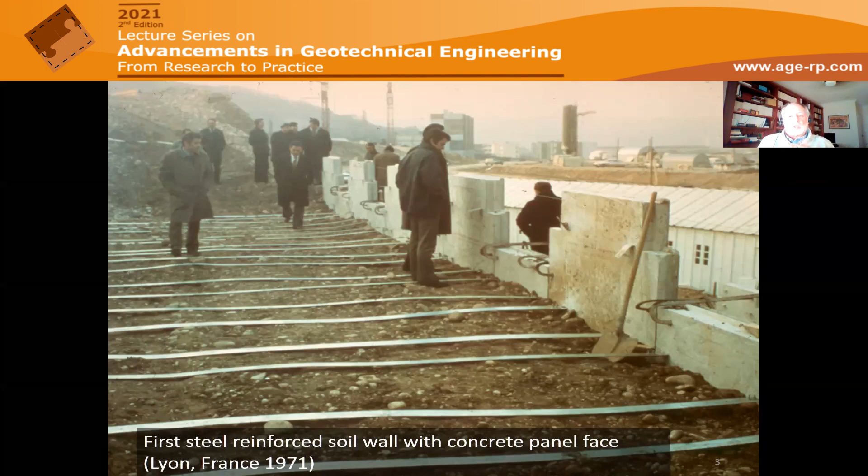Going back in time, the first substantial reinforced walls were constructed with steel strips. This particular slide shows the first example, the first substantial walls constructed in France using steel strips. This slide is very important because it shows the first steel reinforced soil wall constructed with concrete panels. Today these types of systems are built routinely, and some of them are quite impressive, including this steel strip reinforced wall that was part of the SeaTac airport runway expansion near Seattle, Washington State, US.

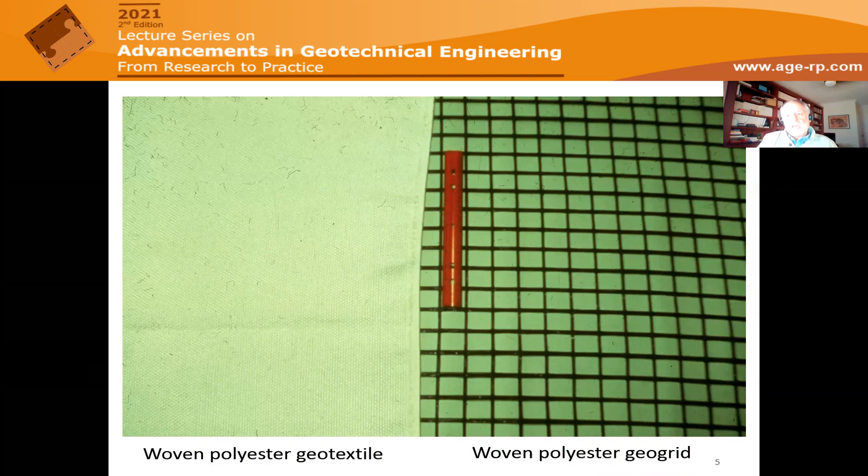Starting in the late 70s and into the 80s, high performance polymeric reinforcement materials were invented, including woven geotextiles and geogrids and many other types. These materials were then available to construct MSE walls.

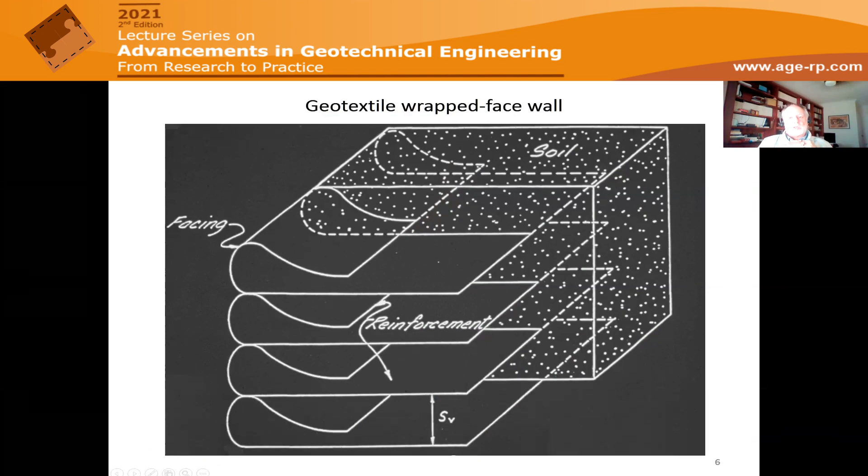The first types were quite simple. They involved placing horizontal layers of reinforcement and then wrapping them around at the front to form the facing and then tucking them back in. This was a particularly efficient way of making MSE walls, although arguably not very attractive. This wall shows the largest wrap face wall of its type at the time it was constructed in 1989 - you can see it's about 13 meters in height, and you can clearly see the wrapped faces or layers. This was used to contain one side of a preload at a construction site in Seattle. It was a temporary structure, and that's why the wrap face was okay.

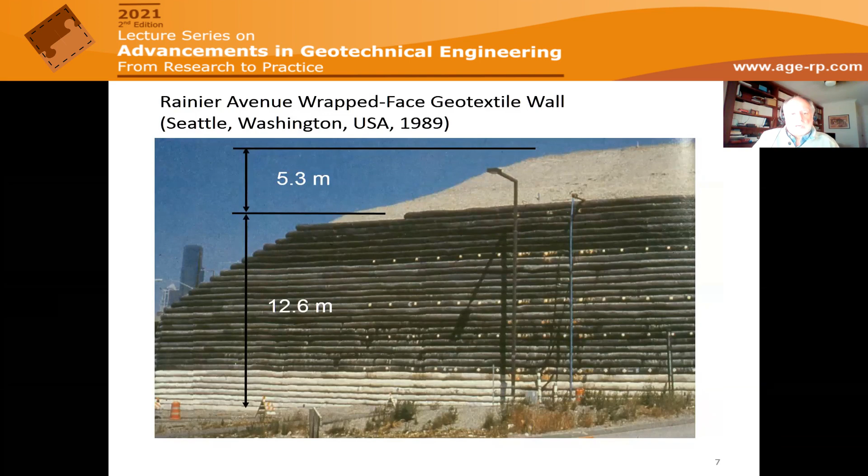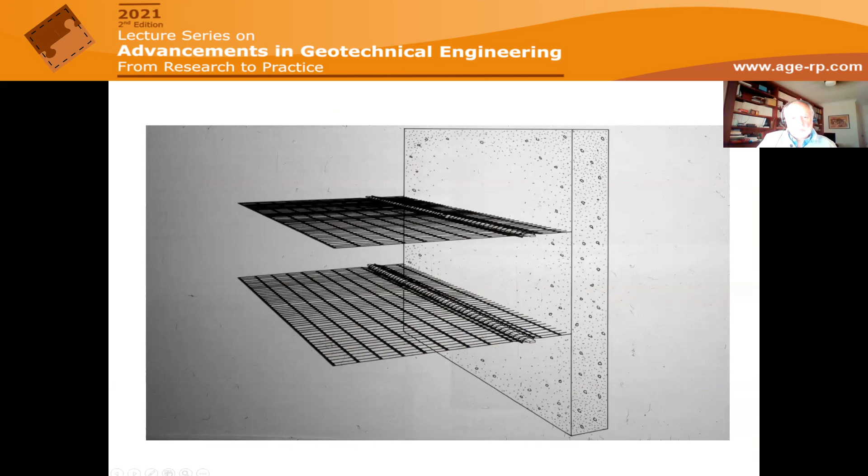Nowadays we see the use of modular block units to form the facing. Most often the blocks are made of dry cast or masonry concrete, and these blocks are stacked to form the facing and tied back with horizontal layers of reinforcement. The facing, the reinforcement layers, and the reinforced soil form a composite gravity mass which acts to resist the retained soil behind it.

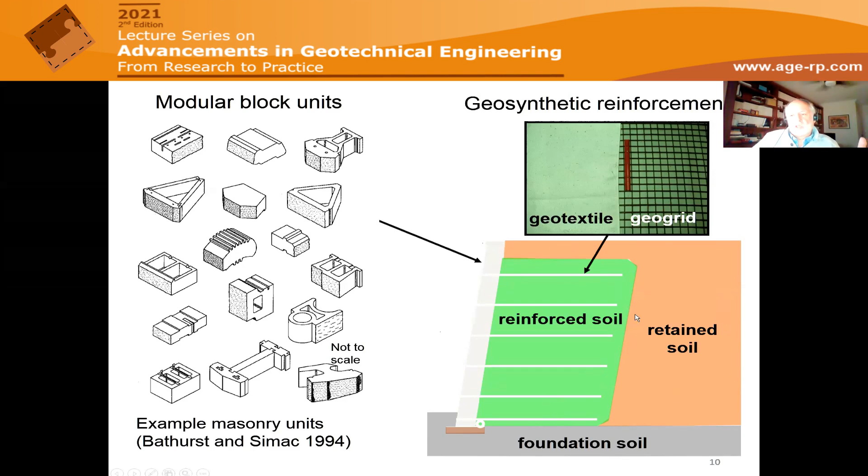The first substantial wall of this type in Canada was constructed in 1988, a 7-meter high wall. This was the first structure of this type I got involved in, and it precipitated a long relationship with this type of technology.

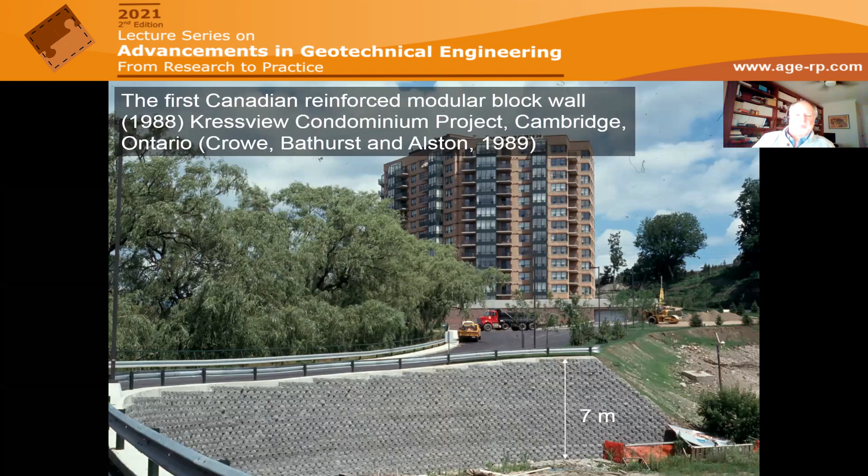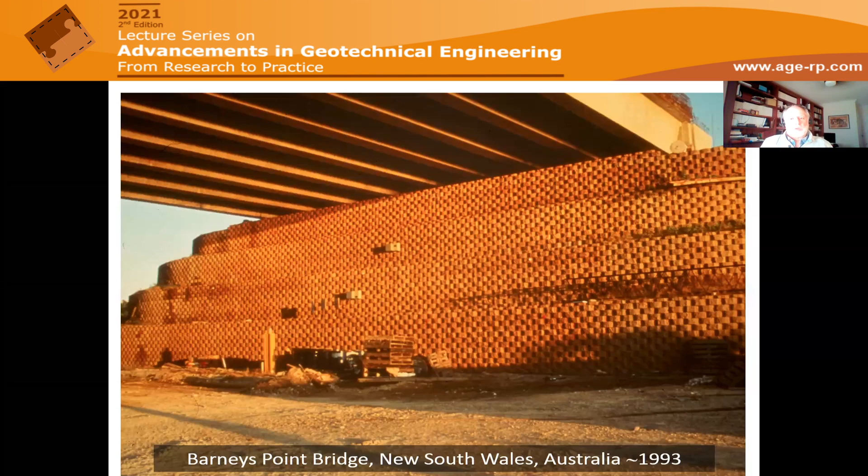This wall may be familiar to some of you. This is the Barney's Point wall, which was part of the support for a bridge abutment about 104 kilometers south of you folks. If you look at the inside of this structure, you'll see it's a tiered wall. You can see the different tiers, and the bridge deck or bridge beam is seated directly on top of the reinforced soil mass. This was one of the first applications of this type, and I must say it was pretty brave, because this was built about 1993.

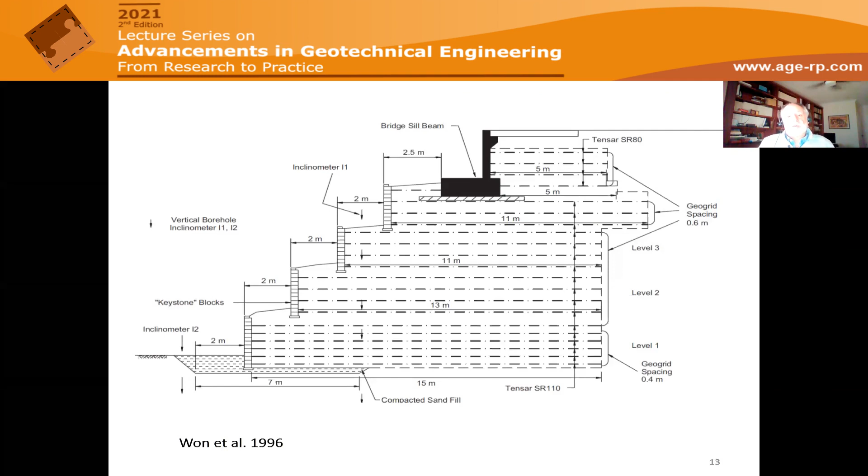Other types of reinforcement materials that have come onto the market are polyester strap type reinforcements. These are strips that are typically woven back and forth, as you can see here, but they perform the same function as continuous sheet geosynthetic reinforcement materials, performing the same MSE function.

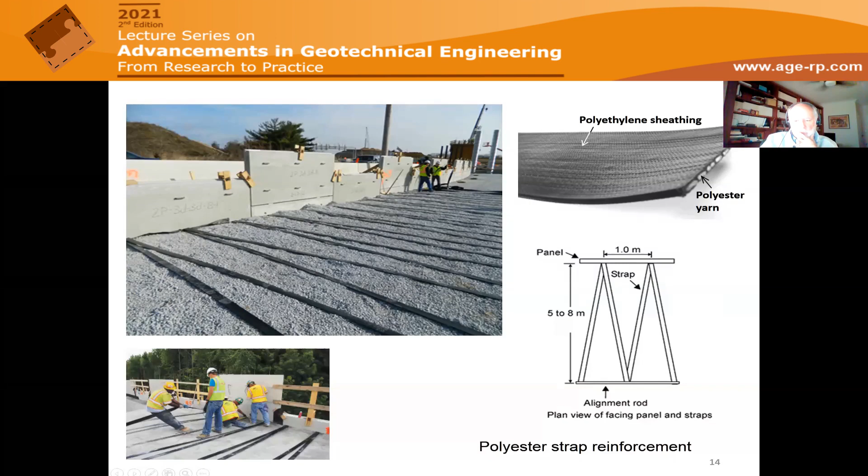So what we're really interested in for this presentation is the internal stability limit state design of these systems. The methods in use today are essentially variants of the classical tie-back active wedge method. What folks have done, including myself, is empirically adjust the predictions of load on the reinforcement based on measurements. But the basic procedure is to assume that the reinforcement acts to tie back a wedge, which will be clearer in the next slide.

These design methods are packaged in different ways. For example, in North America, they're framed within a load and resistance factor method, LRFD, but in Europe and Australia they use a partial factor approach. I'm not going to get into those details — we're going to focus mainly on the mechanics of what's going on with respect to internal stability of these systems.

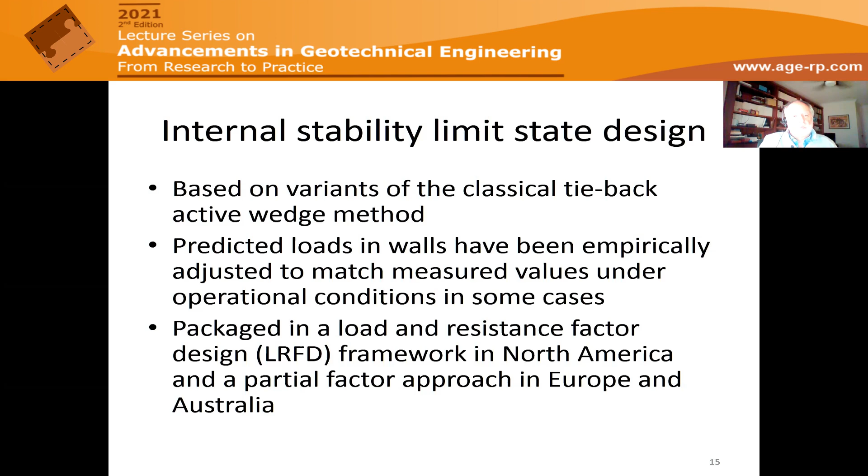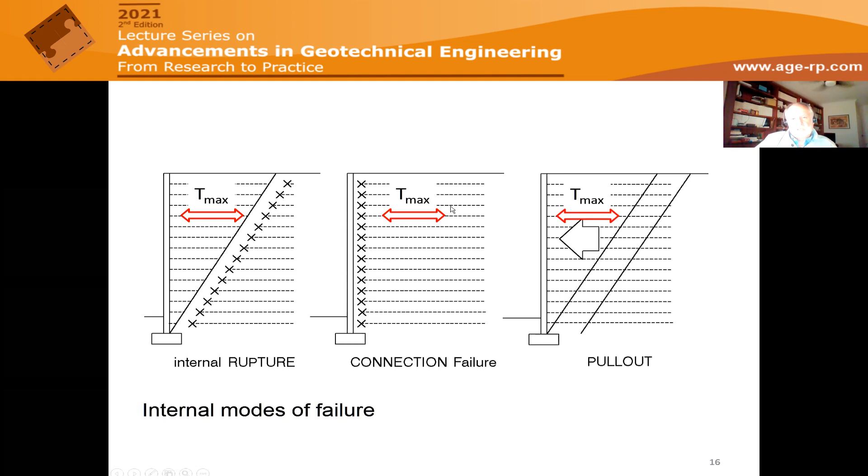My presentation is going to focus on the calculation of the maximum tensile load in the reinforcement. This is the load side in internal limit states, including the limit state for internal rupture of the reinforcement or overstressing, failure at the connection between the reinforcement and the facing, and pullout of the so-called tieback wedge from this resistance zone. So we're most interested in how do we calculate Tmax.

Until recently, our ability to accurately predict these design loads, Tmax, in reinforcement layers under operational conditions was lacking. I'm not interested in the loads at failure — I'm interested in the loads that will be in the reinforcement during its design life under serviceability conditions.

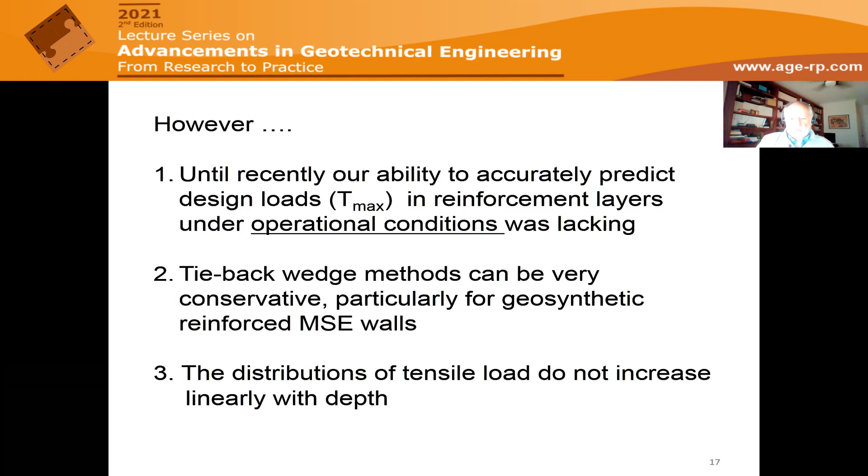What we discovered very early on is that the tieback wedge methods in place a number of years ago tended to be very conservative with respect to the calculated Tmax values, particularly for geosynthetic reinforced soil walls. In addition, the distributions of tensile load didn't increase linearly with depth as one would expect for simple wall configurations. I'll touch back on this a little later.

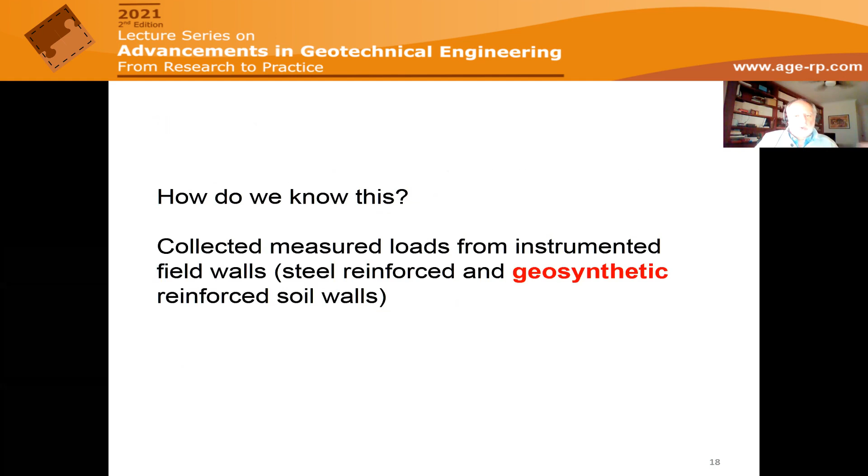So how do we know this? We know this because myself and my colleagues collected, over a period of about three decades, measured loads from instrumented field walls, including both steel reinforced walls and geosynthetic reinforced soil walls, although my talk will focus mainly on geosynthetic structures.

You saw that very high wrap face wall in Seattle. Well, this wall was very important as well because it was heavily instrumented. During construction, at the end of construction, and during surcharging, strains were recorded from strain gauges mounted on the reinforcement layers, and then the tensile loads in the reinforcement were deduced from those strains.

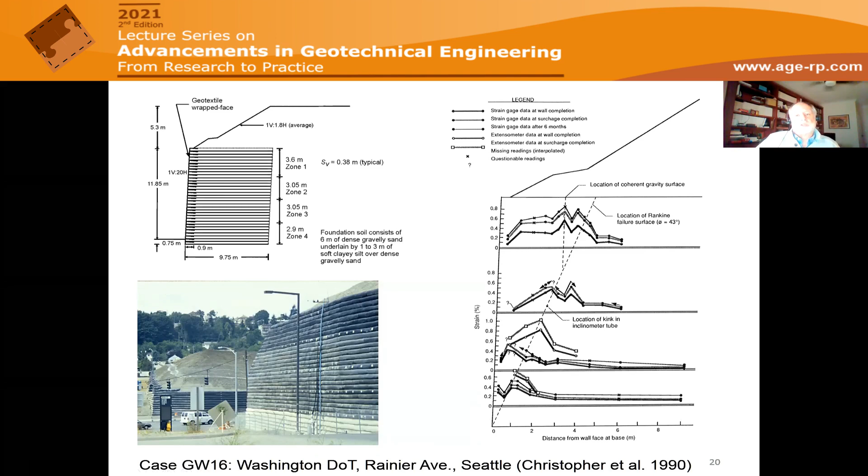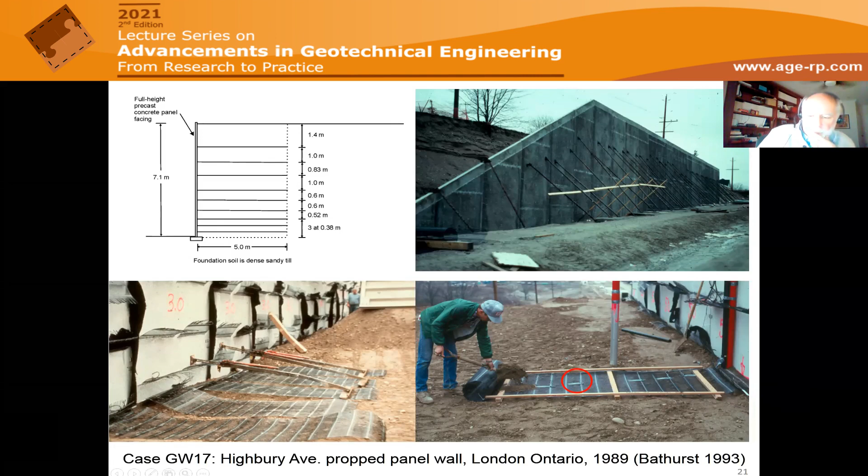So how do we calculate the predicted loads in reinforcement layers? Well, the essential procedure is to assume that each layer of reinforcement is responsible for carrying a certain portion of the horizontal lateral pressure acting against the back of the wall. This lateral stress, acting over a contributory area for each reinforcement layer, is calculated simply by multiplying the vertical stress due to the soil by some coefficient of lateral earth pressure, which we can call Kr.

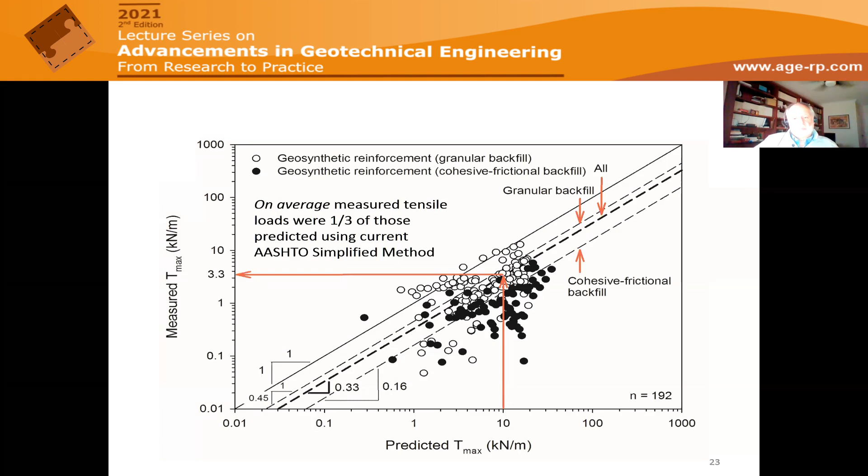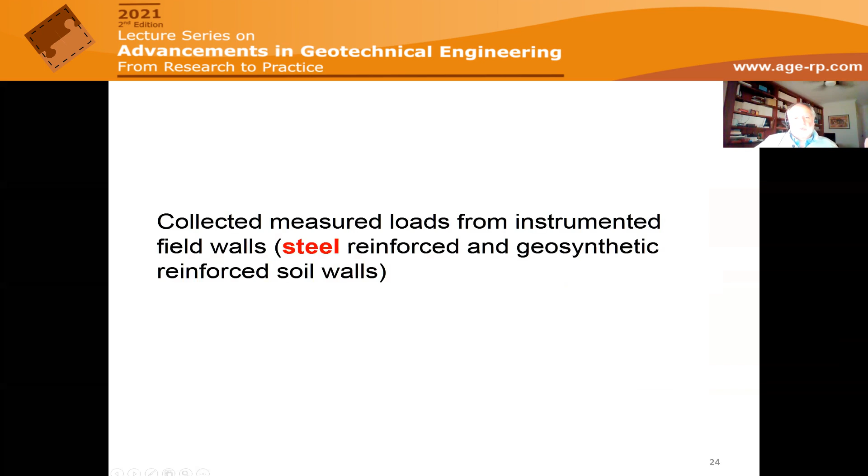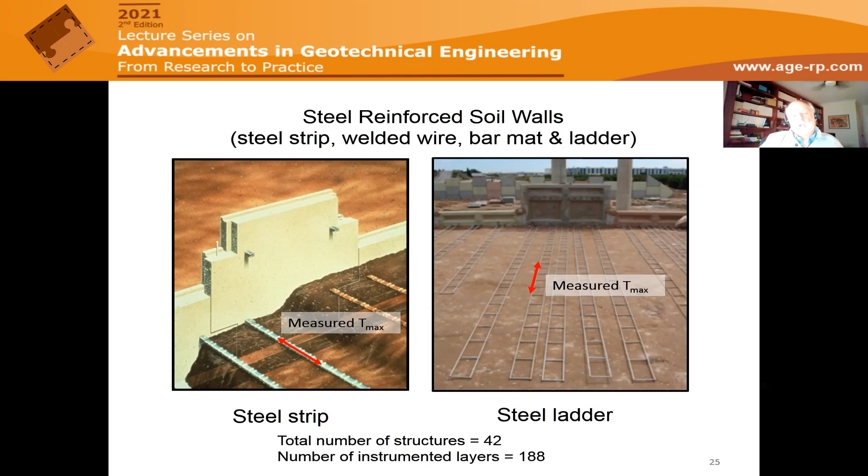Now we collected measured loads from both steel and geosynthetic reinforced walls. For the steel reinforced walls, which included strip type and bar mat types, or ladders, as just two examples, it's fairly easy to deduce what the tensile loads are under operational conditions, because you just attach some strain gauges, and knowing the modulus of the steel and its cross-sectional area, it's easy to deduce what the load in the reinforcement is.

And then we did the same thing that I showed you for the geosynthetic reinforced walls. We calculated the predicted load for each of our measured loads, and then we went to design charts, the same design chart that I showed you before, which tells you what this normalized coefficient of earth pressure should be with depth below the top of the wall. You can see for steel, for example, it's a bilinear curve. Again, you take off from this chart what this value of Kr should be to calculate T max for each layer. So we had a measured value, and for each measured value, we were able to compute a predicted value.

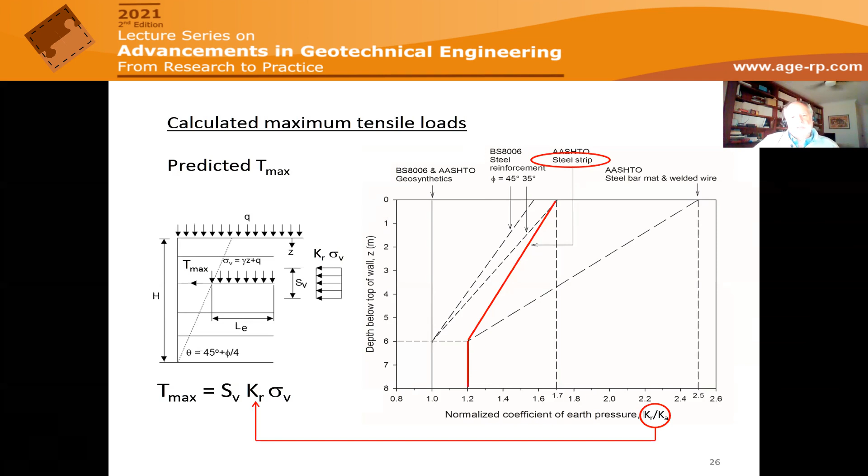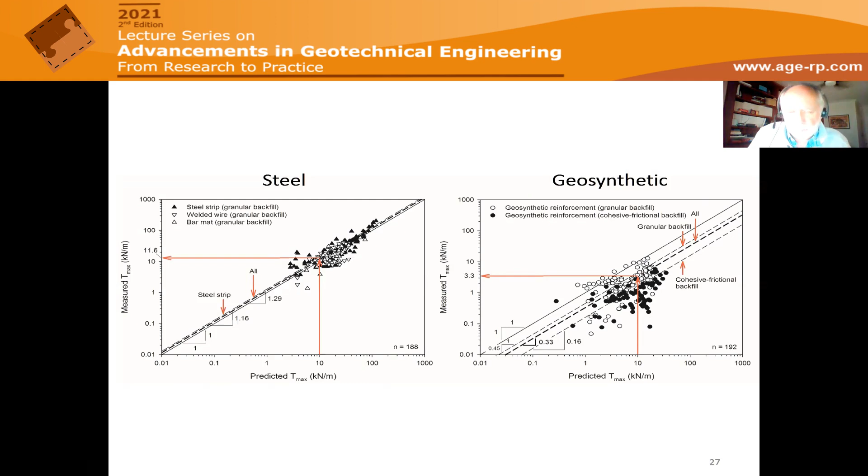So why the better prediction accuracy for steel reinforcement? Well, the reason is at the very start of the steel strip reinforced wall technology, the inventors of this procedure empirically calibrated measured loads from their instrumented structures.

Whereas the geosynthetic reinforced walls in the early days, they just assumed that the soil was at an active state, according to Coulomb or Rankine theory under operational conditions. One of the reasons for this was that in the early days of this technology, there were no instrumented structures in which the measurements could be used to empirically adjust the predicted loads based on what was measured. So these loads couldn't be adjusted the same way that the folks that developed the steel reinforcement were able to do.

Now, geosynthetic reinforced walls are complicated systems. First of all, they comprise soil, and let's admit it, soil's difficult. It's a three-phase material, and even physicists won't touch soil, okay, because it's so complicated. Yet we have to deal with it on a day-to-day basis.

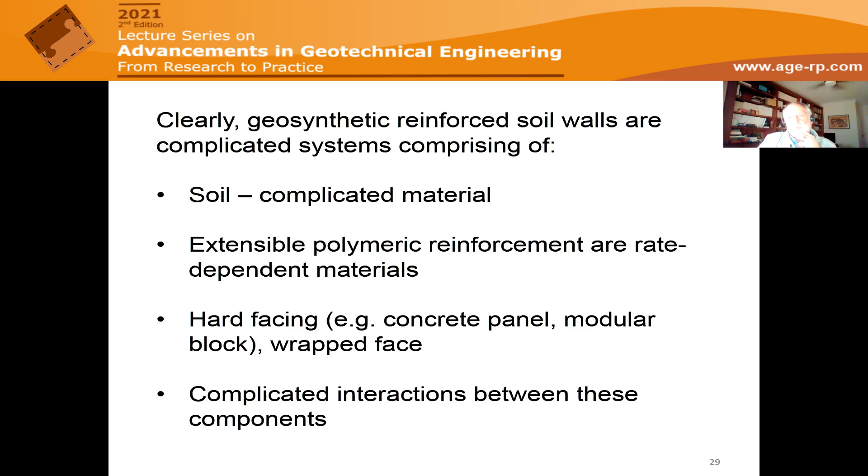Furthermore, extensible polymeric materials are rate-dependent materials. That means their stiffness, if you like, is a function of strain, time, load. So very complicated. Let's make it even more difficult by having a variety of different facing materials. They can be hard facings like the concrete panels and modular blocks that we saw earlier, or they could be wrap face, a much more flexible system. And then there are complicated interactions between these components. So the expectation of coming up with a simple theoretical based model for the design of these systems is really hopeless.

We have to rely on empiricism and measurements. Now, to better understand these systems, there's a need to carry out carefully controlled laboratory full-scale wall tests in addition to field structures. By carrying out carefully controlled and conceived full-scale tests in the lab, we can pick apart the mechanisms and the behavior of these systems more easily than field walls.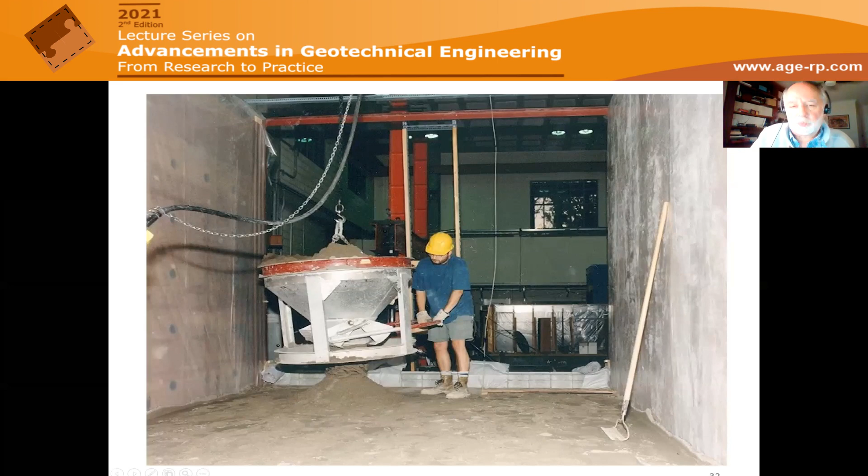Here you can see a view that shows one of these walls about a third completed. And here you can see the reinforcement layers. You can see extensometers. Here we can see load cells and other instrumentation.

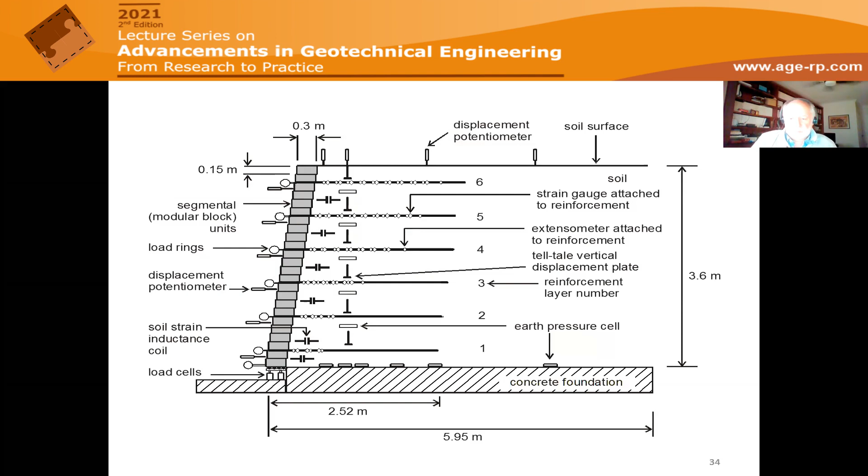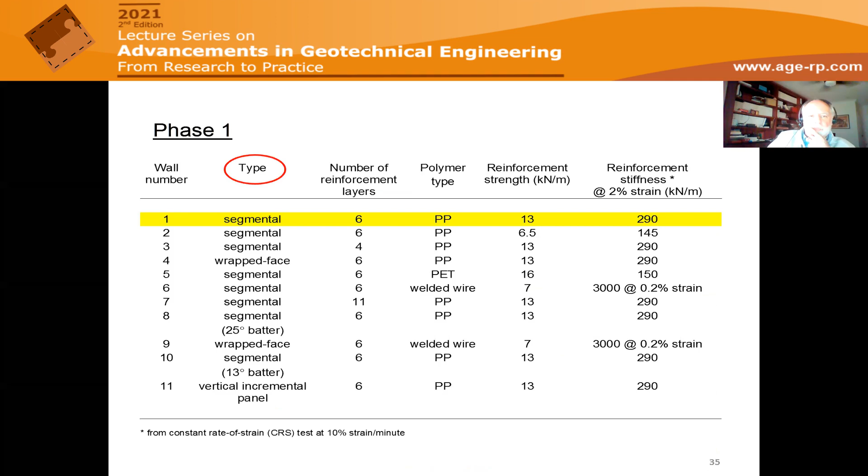And in the first phase of this program, we built 11 walls, and the walls varied with respect to type. Some were segmental, some were wrapped. They varied with respect to number of reinforcement layers, the polymer type of the reinforcement, the strength and stiffness of the reinforcement. So the idea was that we varied one parameter in each subsequent wall from the initial control wall, which is identified as wall number 1 here.

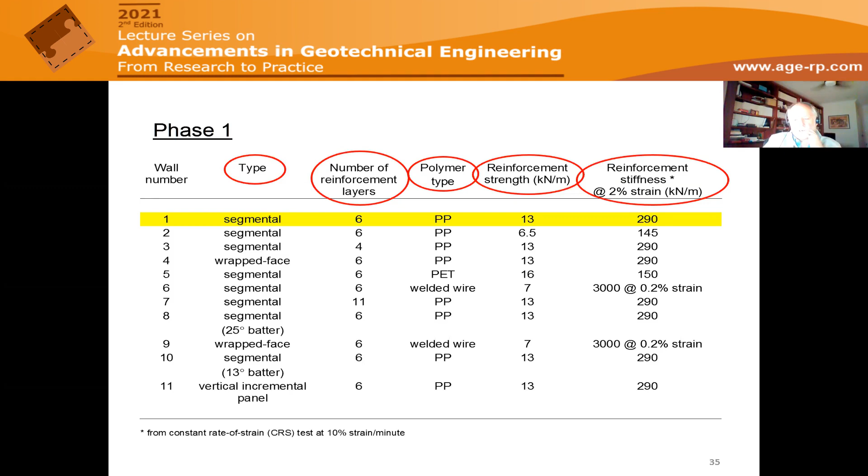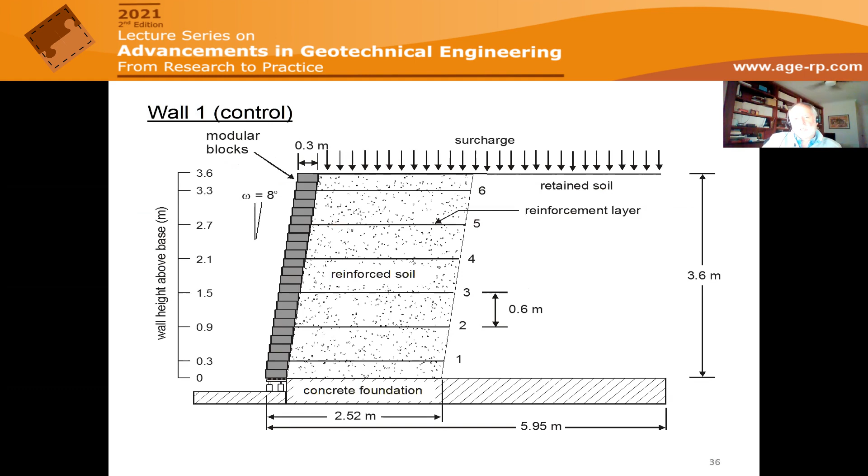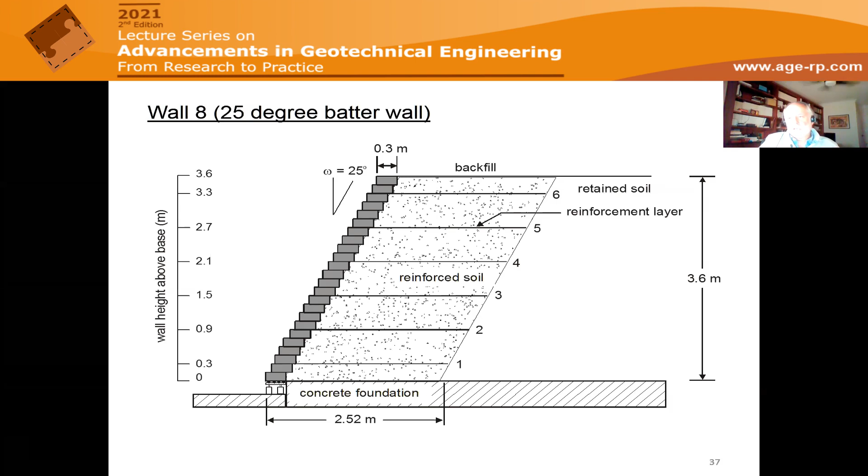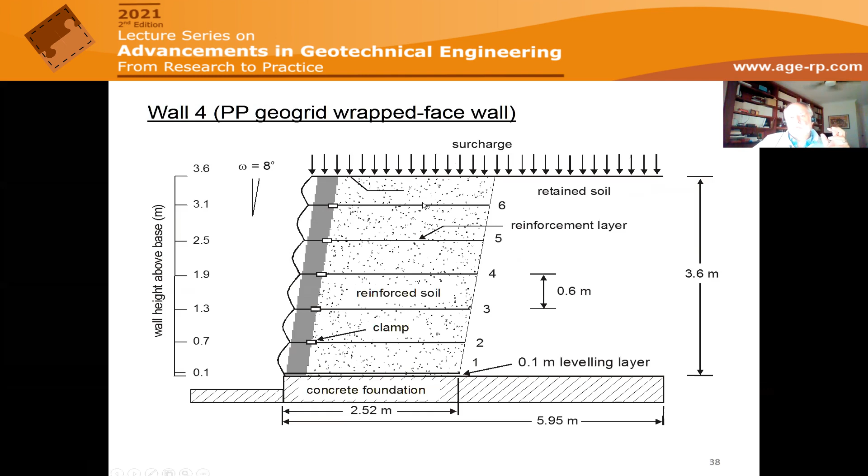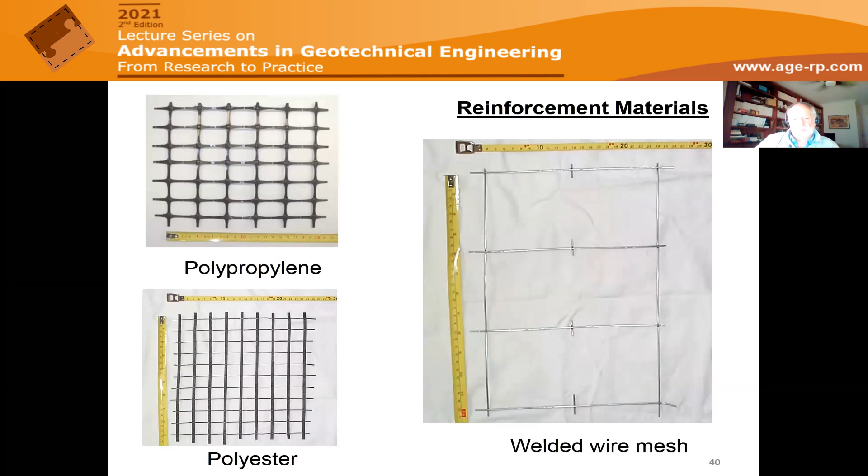And I mentioned in that table that we use different types of reinforcement materials. So for example, we had polypropylene, polyester, and we even investigated the effect of stiffness by using a welded wire reinforcement. So this allowed us to investigate the effect of reinforcement stiffness.

Now here are pictures of 2 of these walls side by side. This is me here for a sense of scale. So these walls were 3.6 meters in height.

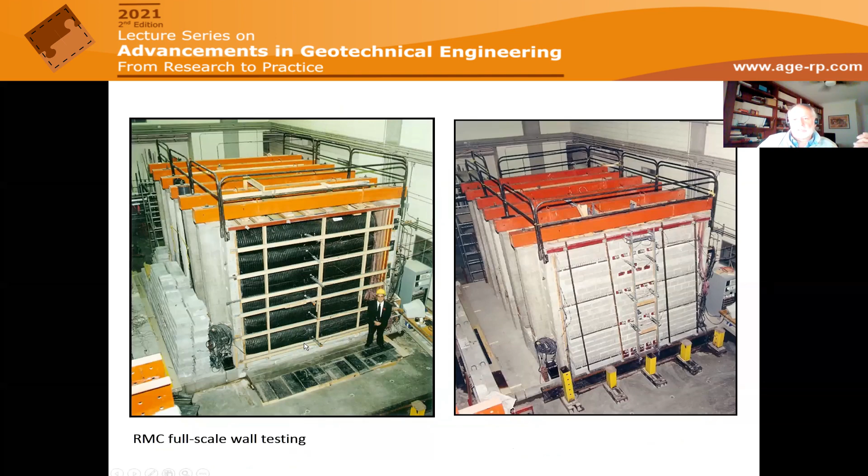Now I want to say that we are not the only ones building full-scale walls. My long-term friend and collaborator, Dr. Yoshi Miyata, at the National Defense Academy in Japan, has also been engaged in this type of work. I remember when I first told him about what we were doing, he said, 'Oh, well, maybe you should see what we're doing.' They were building similar types of instrumented structures, except they were bigger, like 6 meters in height. We've been fortunate to collaborate on writing up and understanding the behavior of these walls.

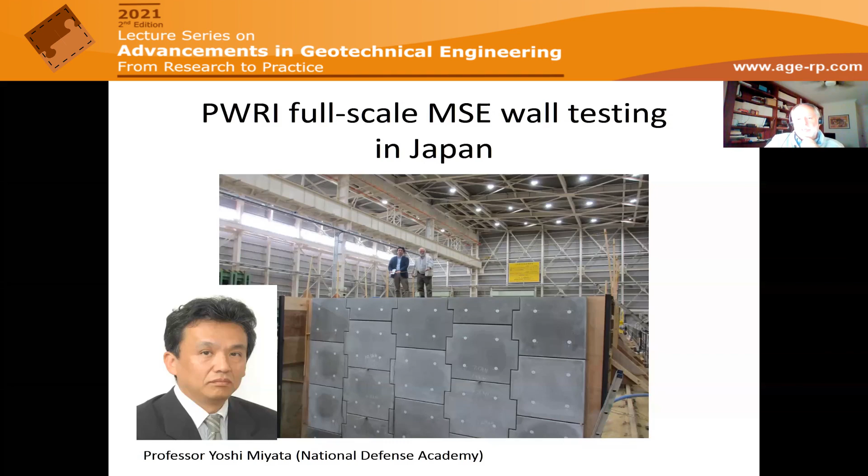Here you can get an appreciation of the size of some of these test walls built in Japan. The interesting thing in Japan is that if you have a proprietary wall system you want to sell into the marketplace, the Japanese require that you build at least one of these walls at full scale in one of the government laboratories, instrument it, and convince the agencies in Japan that the system works. This has generated a tremendous amount of data, which Dr. Miyata and I have had the privilege of writing up in a series of papers.

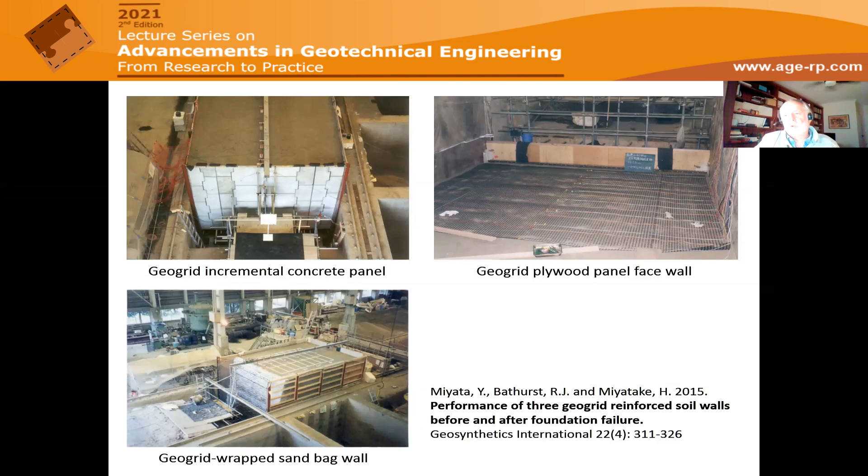So what are the lessons learned from these laboratory full-scale tests and these instrumented and monitored field tests? Well, here's a whole list, and I'm not going to go through them one by one—that would be terribly boring. So what I'm going to do is pick a couple of these bullets that summarize some of the important lessons we have learned.

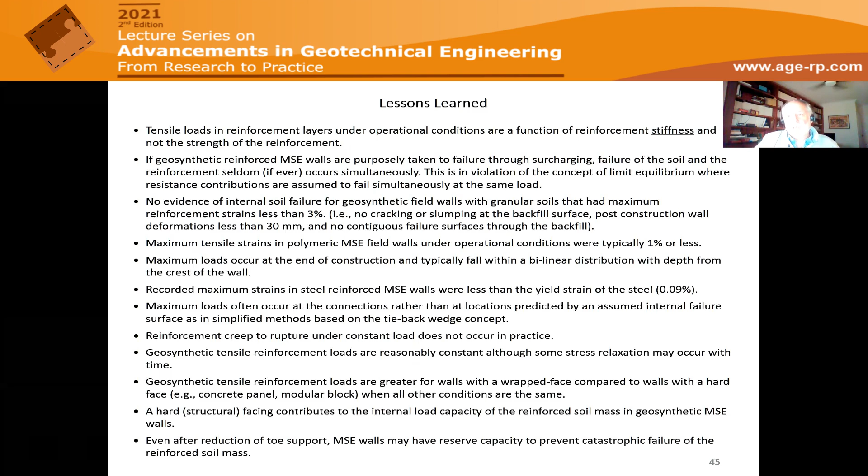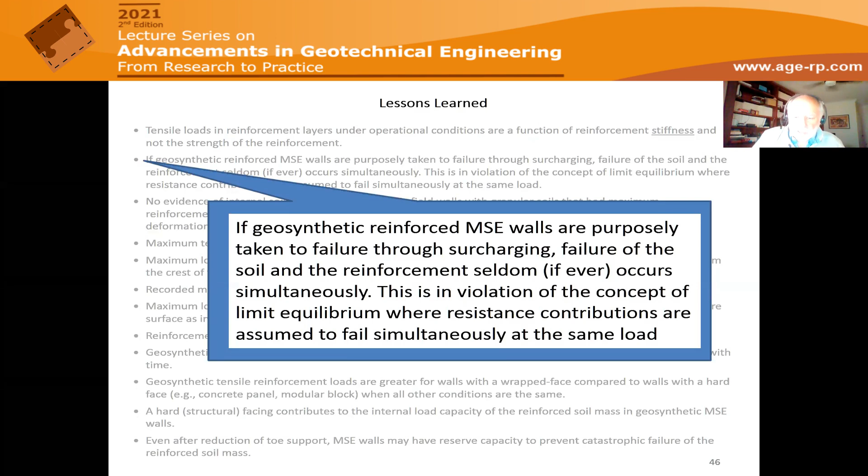The first one is that if you purposely take a reinforced MSE wall to failure by surcharging, the failure of the soil and the reinforcement seldom, if ever, occurs simultaneously. When you do limit equilibrium type analyses with Coulomb forces and all the rest of it, this observation is a violation of concepts of limit equilibrium, where all the resistance contributions are assumed to fail simultaneously. I can demonstrate that to you by looking at the results of some of the tests we've done.

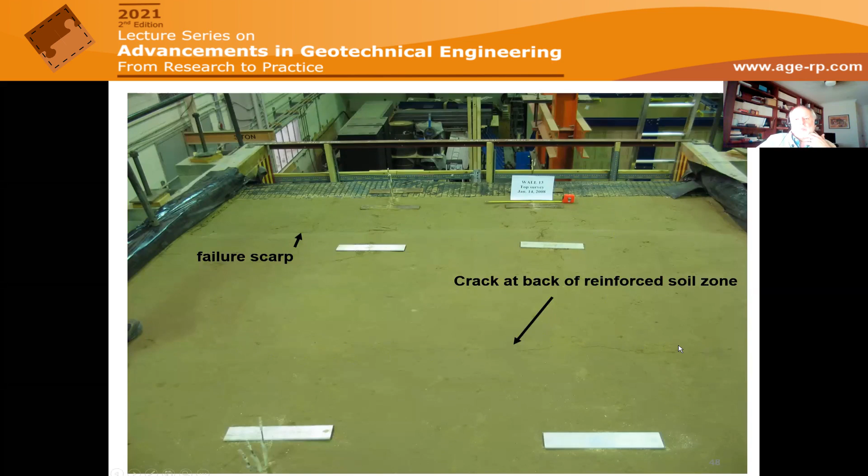After the tests were over, we would take the surcharging system off. What you're looking at is the top of the soil mass behind the facing of this wall. If you look carefully, you see a failure scarp at the surface, and you can also see some cracks at the location of the back of the reinforced soil zone. If you take an oblique view, you can see this slumped area, and then it flattens out. There's even a crack through here—I wonder what that is.

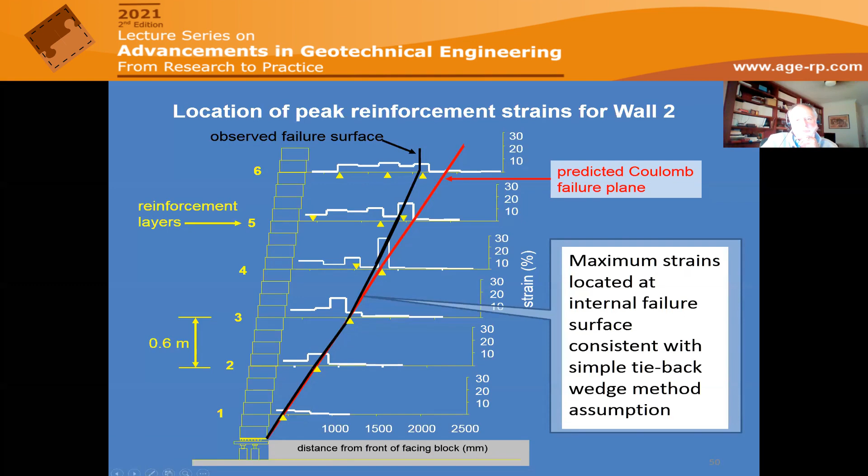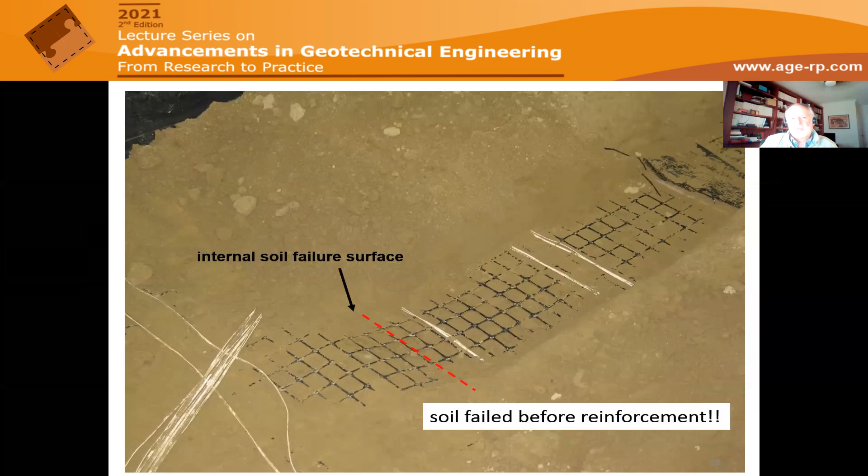Another lesson we observed was that maximum loads often occur at the connections, between the reinforcement and the back of the wall, rather than at locations predicted by the assumed internal failure surface you saw on the previous slide.

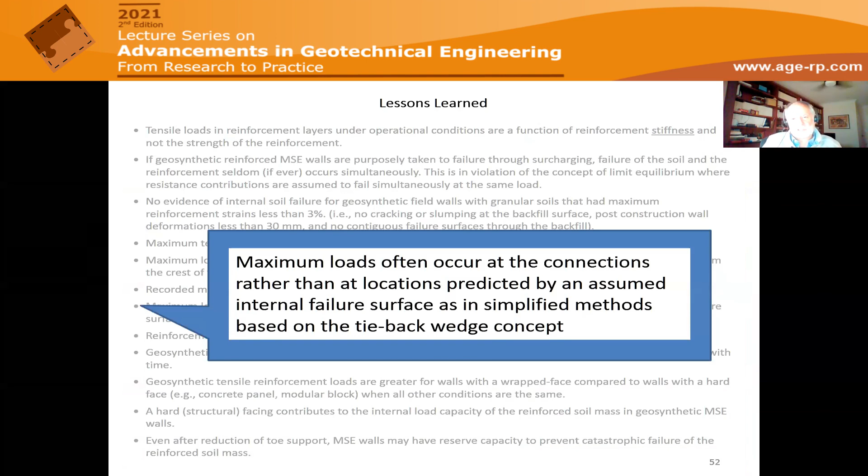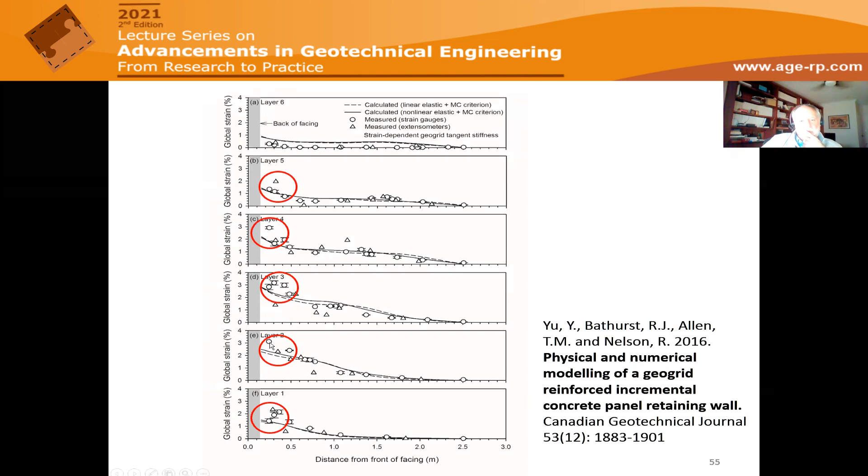Why is that? Well, the reason is that during construction, there's compaction, a little bit of settlement of the soil, particularly as the facing moves out. So the relatively vertically rigid facing stays in place, but the soil moves down, and this imposes parasitic loads on the connections. These are impossible to predict using limit equilibrium methods.

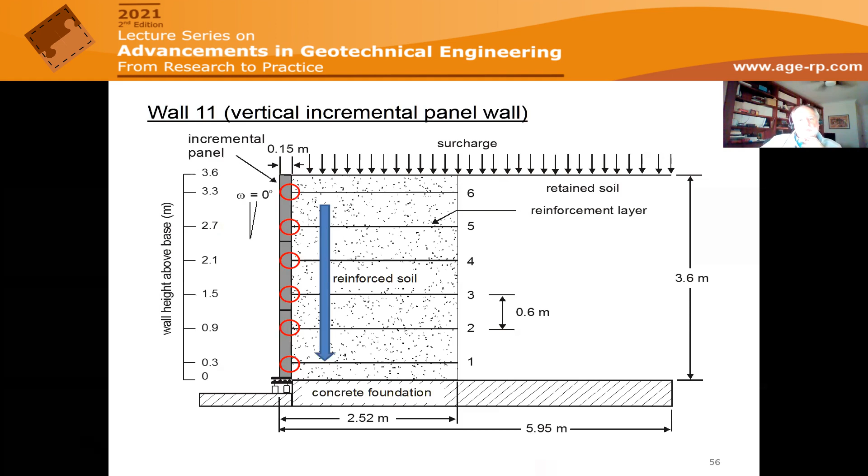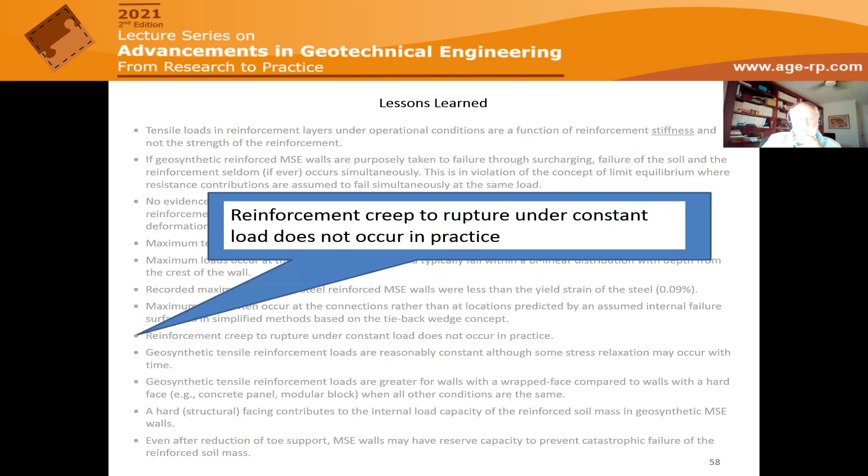Another observation that we made is that the reinforcement does not creep to rupture under constant load in practice. We make the assumption that the reinforcement, if you leave it there long enough, will creep and finally rupture. Well, that same wall that I just showed you, we were able to monitor the strains in the reinforcement during construction, and after the wall had been completed.

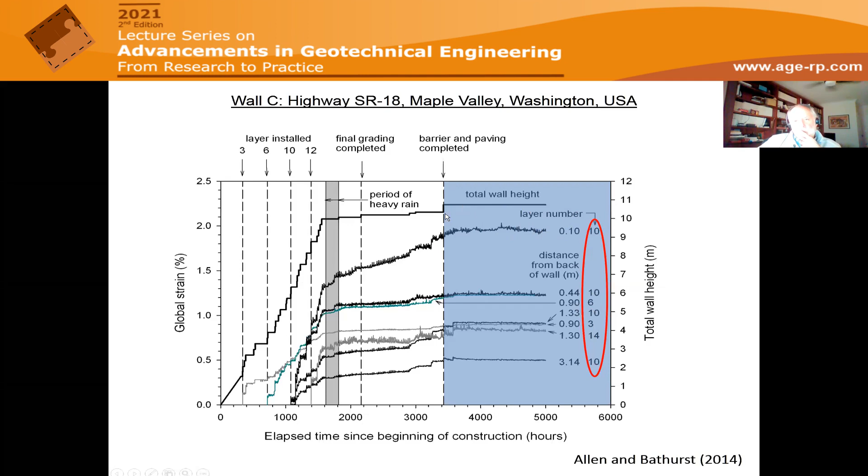The strains in this wall were higher than typical, up to about 2% strain, and they seem to increase with the log of time. But this slope is so shallow that it will be thousands of years before we would get to a rupture strain for these materials. So creep in reinforcement layers in walls under normal operating conditions and strain levels basically levels out and is not normally a problem.

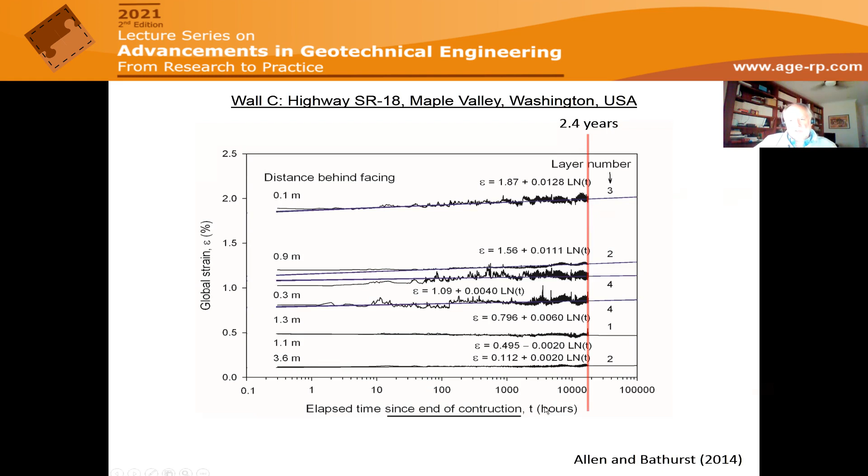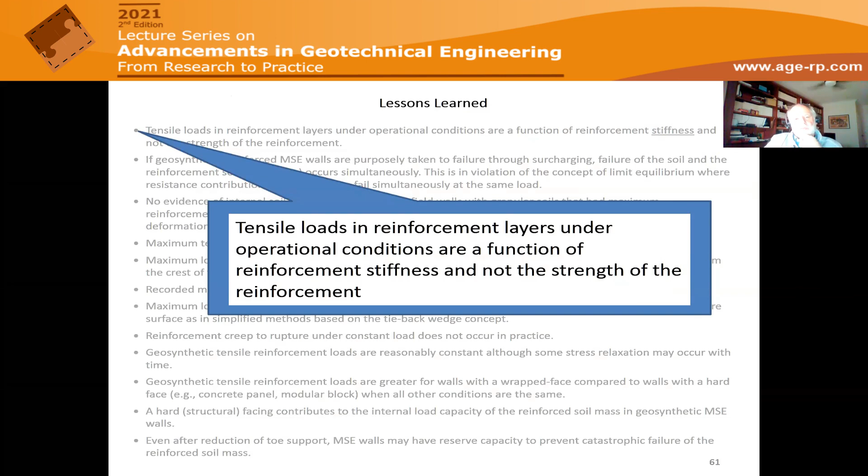A very important lesson that we learned from these tests is that the tensile loads in reinforcement layers under operational conditions are a function of the reinforcement stiffness, not its strength. I could give many examples of that, but I'll choose to show you the results from an interesting pair of walls that were recently tested in Japan.

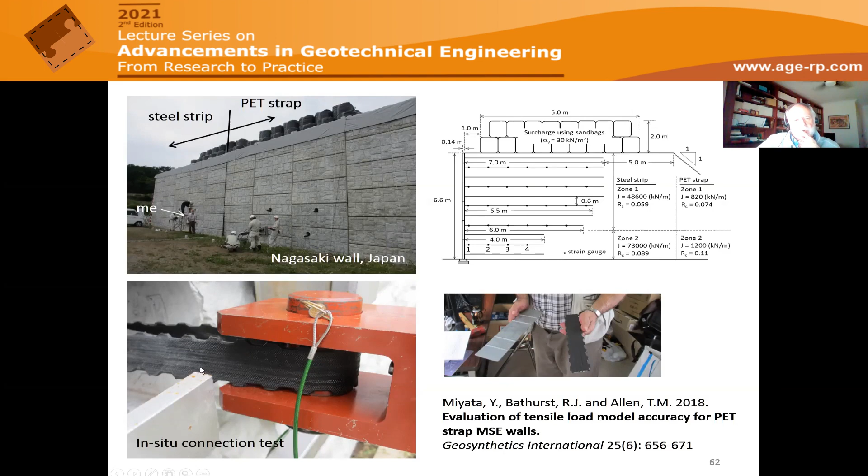The only difference between the pair of walls was that one half had these PET strap reinforcements, which are polymeric materials, relatively extensible compared to the steel strip reinforcement used in the other wall. This slide shows an in situ connection test being carried out on this extensible polymeric strap material.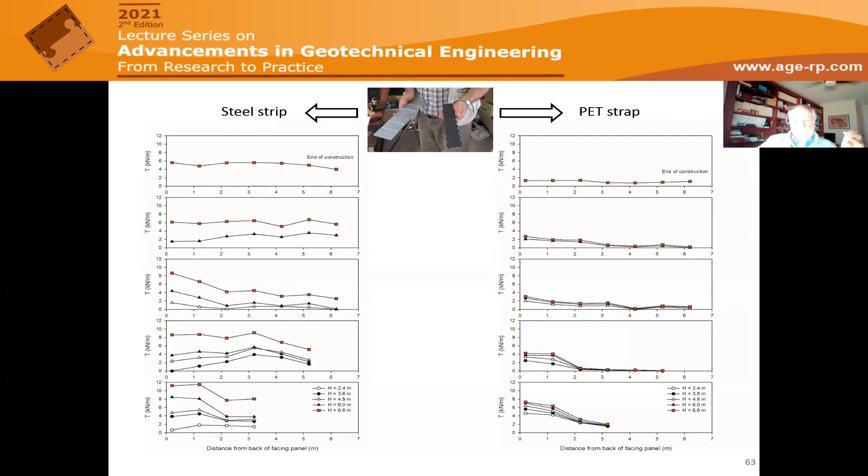So what are some of the practical consequences of what we have discovered for geosynthetic reinforced walls?

Reinforcement loads under operational conditions are less than loads predicted using current limit equilibrium based methods. And this led to excessive amounts of reinforcement, sometimes by a factor of 2 or 3 times.

Equally important, we found that the reinforcement is not distributed in an optimum vertical arrangement if you assume that the loads in the reinforcement are going to increase linearly with depth, which is the old-fashioned way.

And the problem with this over-prediction is that it means the model is bad. And when you have a bad load model, it becomes almost impossible to calibrate these design methods for LRFD or partial factor approaches using reliability-based limit states.

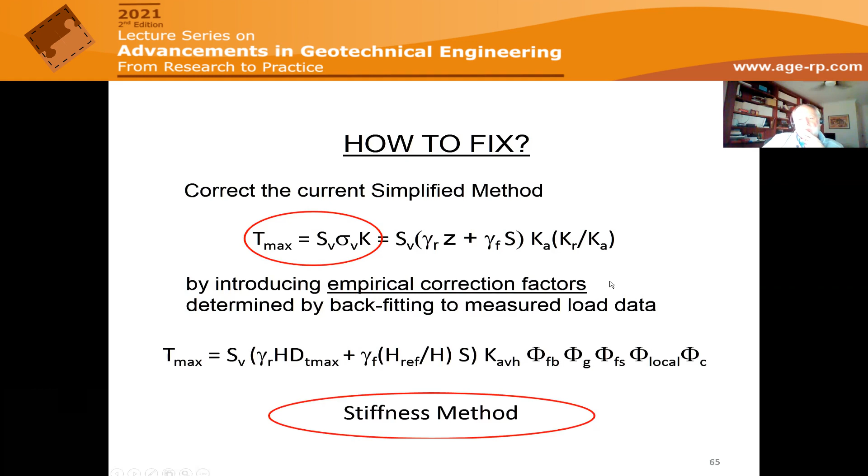This method is called the stiffness method. It has a number of empirical factors that take into consideration the stiffness of the reinforcement, the flexibility of the facing, whether the soil has cohesion or not, the facing batter. All of these things that we know are contributors to maximum load are included in this new stiffness method. But the signature feature of this stiffness method is the stiffness of the reinforcement.

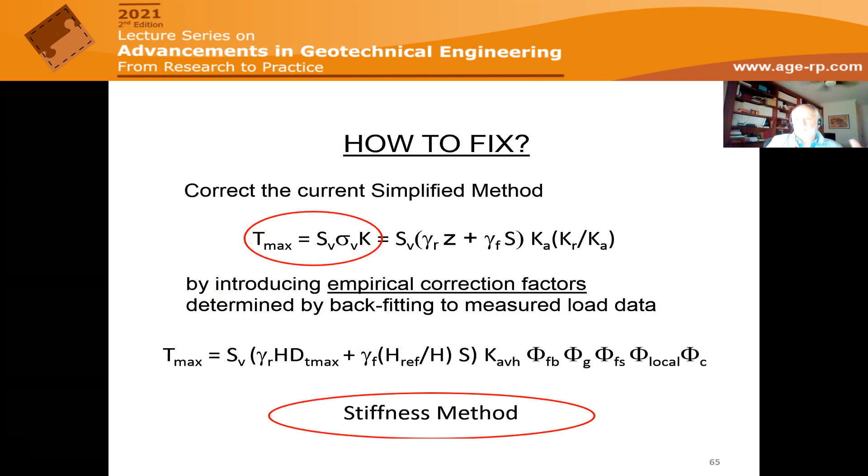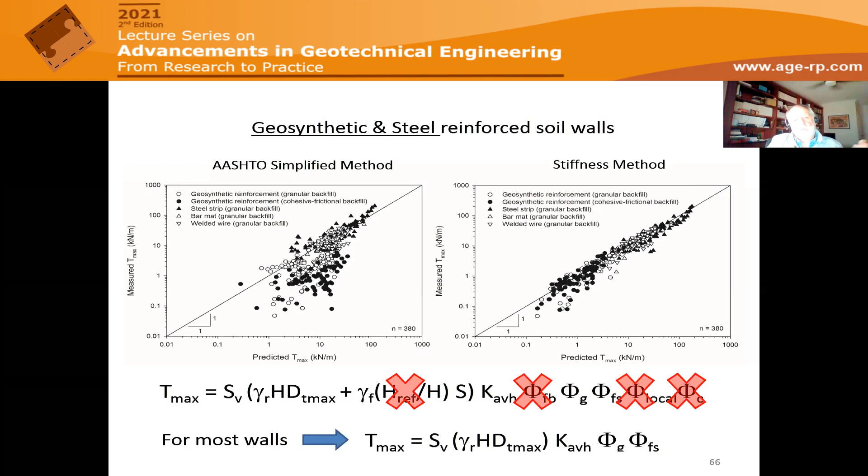This equation that you see here looks pretty scary, but for most walls, you can get rid of or eliminate some of these factors, and you end up with an equation in which you really have only 3 additional empirical factors in the calculation of Tmax compared to what we have been doing in the past with the simplified method.

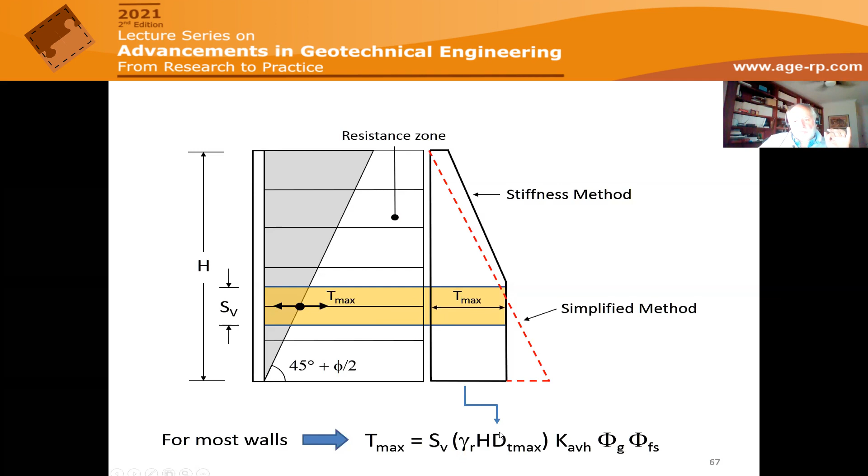And the procedure again is to assign to each reinforcement layer a portion of the distribution of lateral earth pressure. What we found was that the distribution of lateral earth pressure follows a bilinear distribution rather than the sort of triangular distribution that we are perhaps most familiar with. This distribution, which is bilinear, is captured by this DT max factor that you see here.

Now, how do you keep the walls at working stress conditions? Because remember, we're interested in operational conditions. If the strains in the reinforcement were to get too large, then the soil would fail. So we carefully looked at our database, and we were able to find that if you keep the strains in the reinforcement to somewhere between 2 and 3%, then the soil in the reinforced soil mass will be under working stress conditions.

If you let it get higher, you will see signs of failure like cracking and slumping. In fact, you can generate a continuous failure surface through the reinforced soil mass, which is consistent with failure of the soil. Under working stress operational conditions, we don't want the soil to fail.

So how do we know what that strain is? Well, we predict what the maximum load is using our simplified stiffness method. Then, knowing what the stiffness of the reinforcement is, we can calculate what the strain is and make sure that strain is not larger than about 3%.

And if you do that, then this new simplified stiffness method that I've talked about will then apply to your design for internal stability limit states.

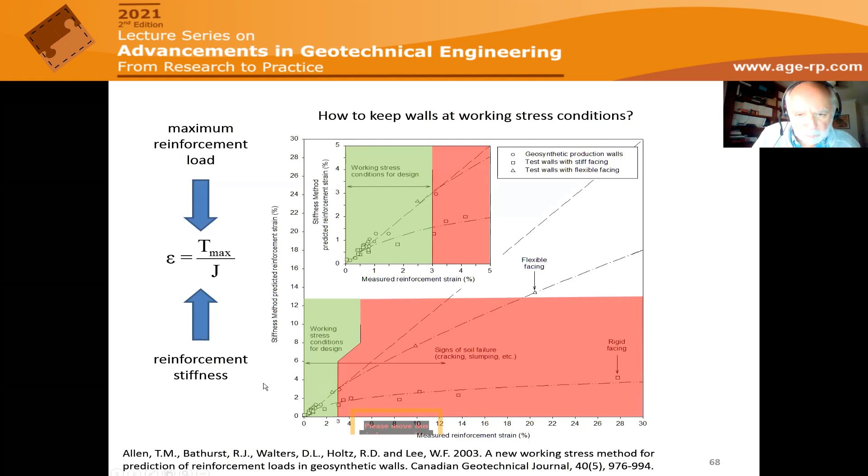And where can you get this stiffness value? Well, fortunately, we've just recently collected all of the stiffness data that we can for a huge range of products, and we've classified the products into different types. And what we were able to find is that there's a practical linear relationship between stiffness and strength of the reinforcement.

So for a particular product or a group of products falling within the same classification, there is a useful relationship that will allow you to calculate what J is. Knowing J, the load, I can calculate the strain.

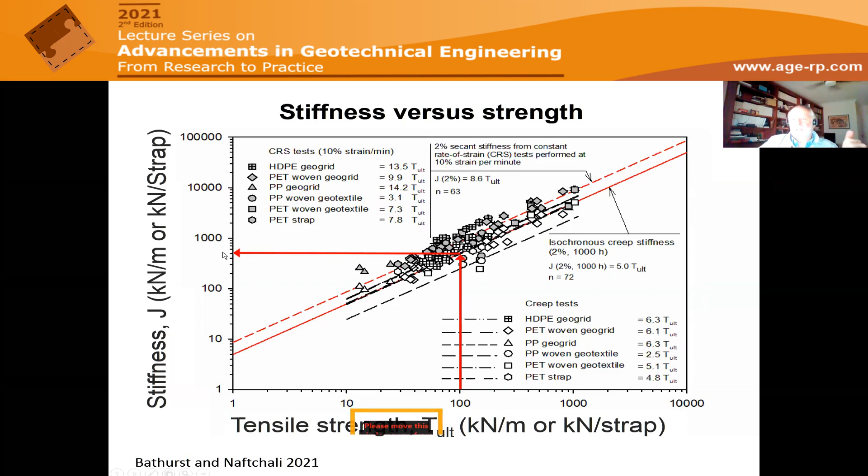But does the stiffness method work? Let's imagine for a moment that we have a field project, and I'm going to design it using the stiffness method. How well is the method going to work? Well, fortunately...

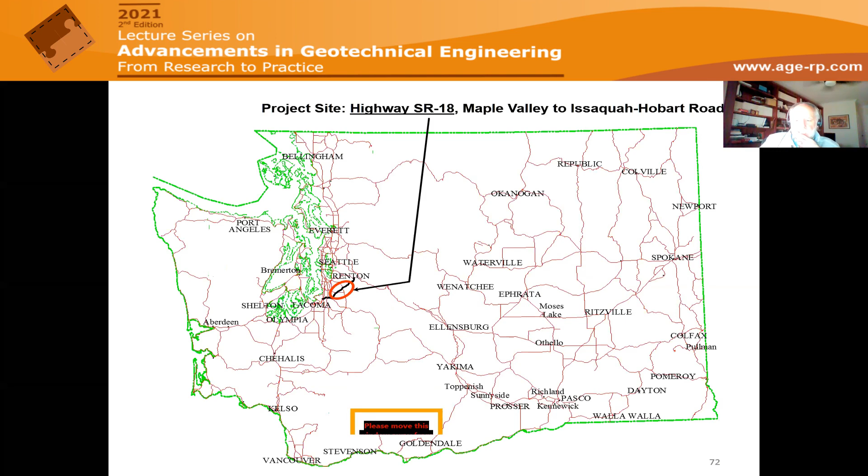Myself and Tony Allen, who is the chief geotechnical engineer for the state of Washington in the United States, had the opportunity to design a pair of walls at the location of an approach fill for a bridge. The bridge is sitting behind the slide, and here you can see this approach fill, with a wall on one side and a shorter wall on the other. We were able to design that pair of walls, instrument them, and then compare our predicted loads to what we observed.

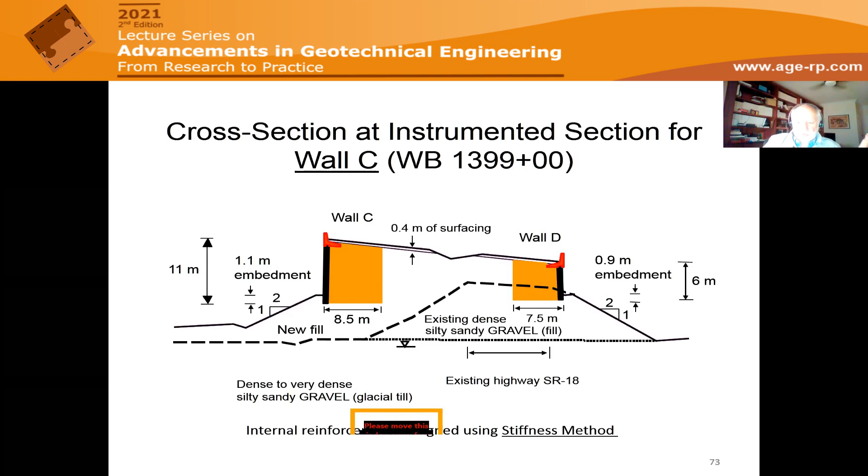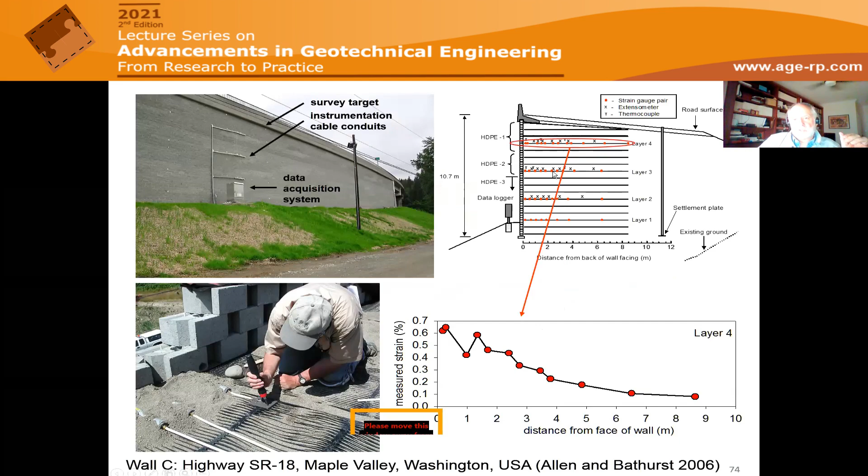And this was the same wall actually that I showed you earlier. So here you can see one of these walls, quite substantial, 11 meters. And here you can see the instrumentation, etc., that I mentioned before.

And here's a comparison. Now, when this was done, we were using a version of the stiffness method which we called the K-stiffness method at that time. This particular method has been evolving with minor changes, with experience and data, over a period of about 15 years. But the essential outcome that you see here is: the vertical scale is depth of the layer below the top of the wall, and the black symbols are the measured loads in the reinforcement.

Now, if we use the simplified method, the old method, the predicted loads are way out here. But when we use the precursor K-stiffness method to the current stiffness method, you can see there was much closer correspondence between measured and predicted loads, and we didn't have this constant linear distribution that you would have predicted using the simplified AASHTO method.

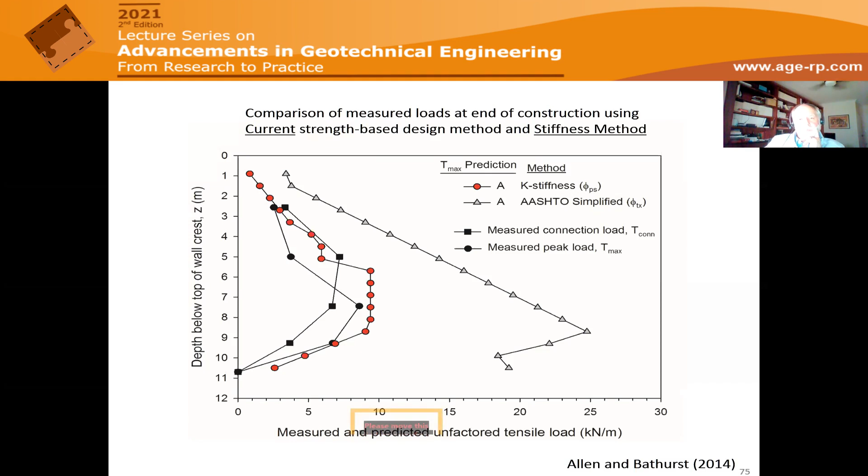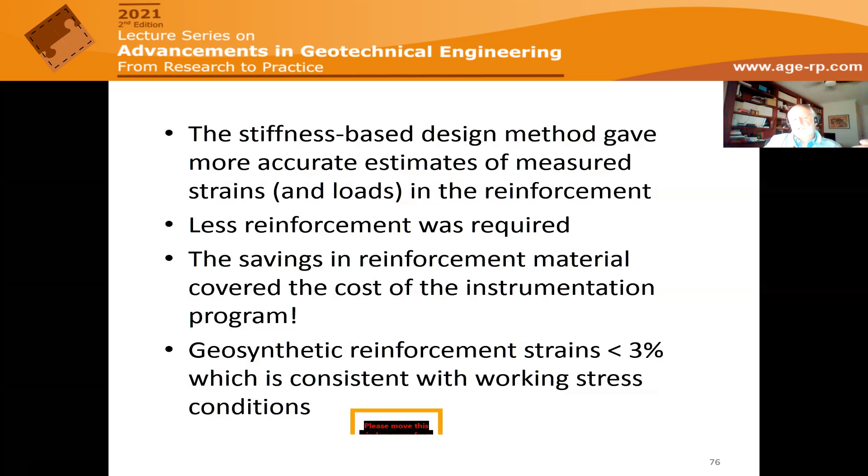So this, in addition to this design method which gave us more accurate estimates of the measured strains and loads in the reinforcement, meant less reinforcement was required. In fact, the savings in reinforcement material for these two walls covered the cost of the instrumentation. The other thing shown in this structure was that the reinforcement strains were all less than 3%, the highest about 2%. This is consistent with the notion of working stress conditions that I mentioned earlier, which are a prerequisite to keep these structures under operational conditions.

So the impact of what we have done over a period of years is that this stiffness method has replaced the current simplified method in the US AASHTO LRFD design specifications for geosynthetic walls. And in Canada, in the next edition of the equivalent code in our country, the Canadian Highway Bridge Design Code, we will adopt this method as well for geosynthetic reinforcement.

I should also say that this stiffness method works both for steel and polymeric reinforcement. The beauty of the method is it's seamless across stiff and extensible reinforcement types, including polymeric strap materials, which are somewhere between really extensible geosynthetics and steel. So it's sort of like one-stop shopping for design using this method.

However, the difference in accuracy is less between the old, simplified method and the stiffness method, because I mentioned to you before that the simplified method for steel reinforced walls was initially calibrated at the time that the steel reinforced wall technologies were first developed.